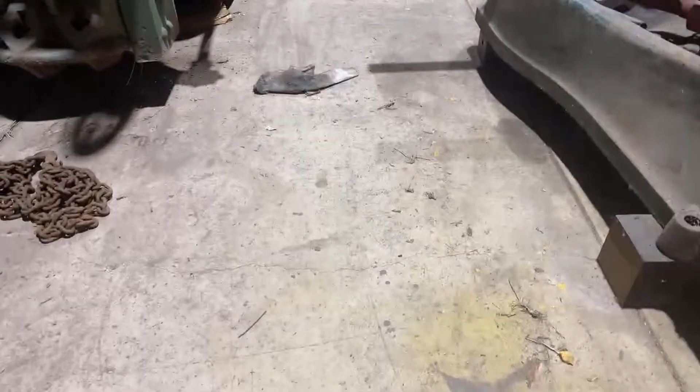Anyway, I was just sitting down for a minute because it's sort of fairly hot today, and I've been at work all day, I'll be honest. Couple of days, pretty big, couple of 3 days actually. Another one still to come. Anyway, we're getting there.

Hey, Bill. Broken glass or something on the ground here, I don't know what that is. Just looking at it now. No idea. Anyway, we should actually do something. Anyway, I'll get up.

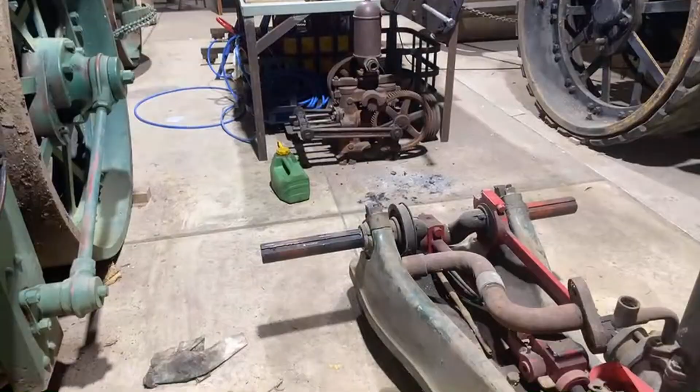Let's have a look. Here, my joints crack when I wait to get up. Oh. So,

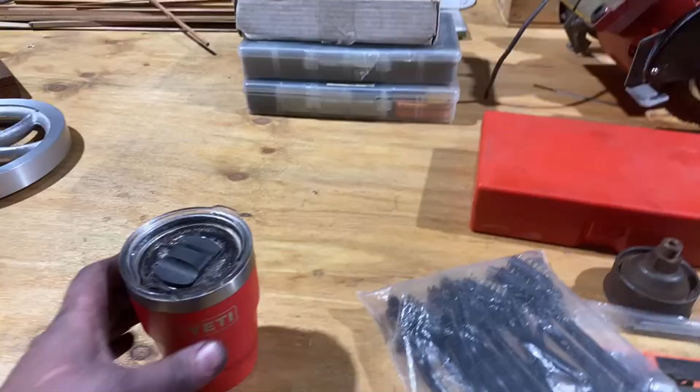Went away on the weekend. What did I do Thursday night? Probably not very much, to be honest. Probably had to sleep, did some groceries, did some laundry and stuff. Friday morning went out to Walker. Where's Walker? Walker's up on the tablelands, I guess, in the high country or south, that direction anyway, out west of here, and a bit south.

A club member had a steam engine and a sawmill set up there, so we had a bit of fun, a couple of nice meals, good friends. It was a really good weekend. I was out there, got there Friday night, did I? Friday morning, got there Friday lunchtime, couple of stops, Friday lunchtime.

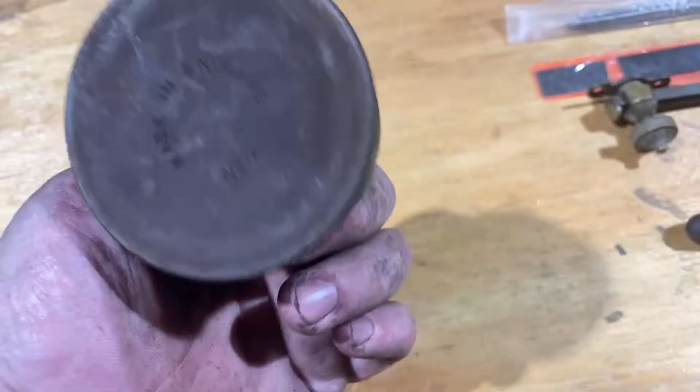What else? Found 2 new grease cups, like brand new, they got made in England written on them. They're not all that old, probably. Be useful for something, maybe. They were the right price, so 2 of them to match, a match pair.

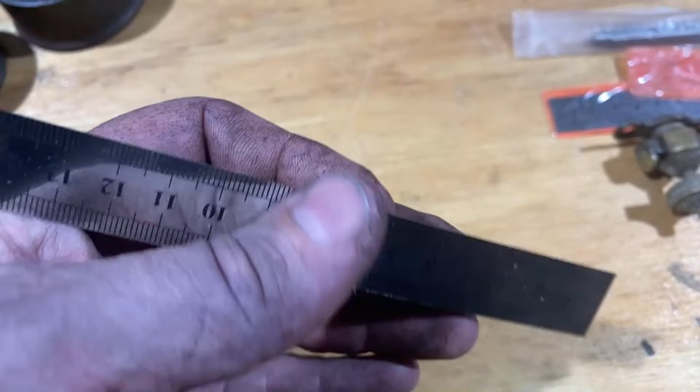Couple of these steel rules, gee, they're thin. Inch on one side, metric on the other side, hopefully. So they were worth having for $1 each.

Junk tool seller, always, never got enough of them. Inspection mirror, never got one of them, that's ever something you can find. So I've got another one of them, need one of them.

My watch just fell off.

They've got a fairly long flute, which is probably really good for drilling brass if they were sharp. This one looks all right.

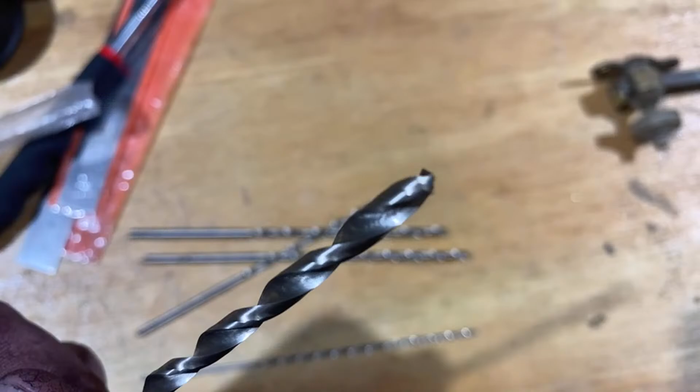I'll just zoom in here and look at some of these. This one's nowhere near on centre, right, no way that's going to cut. This one with a sharper might be all right. This one's sort of in the middle anyway, but yeah, not a lot of twist on that.

And this one's sort of in the middle too, but only just. So they're probably fairly average for the money I paid for them, but we'll see how they go. Might sharpen them up.

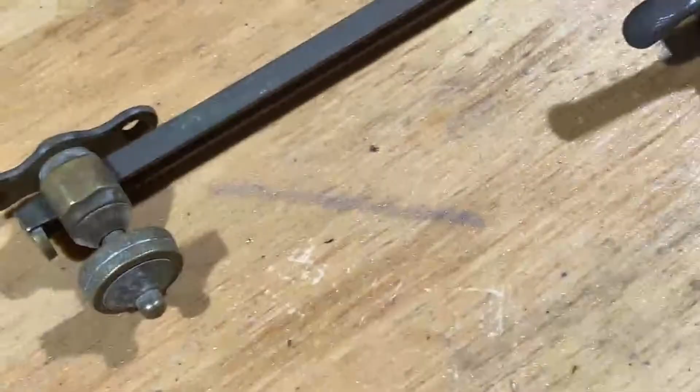Definitely Chinese. No idea what these are - they were in a plastic bag, so you couldn't really see them before you bought them. But I don't think they're much good.

They might sharpen up all right. Got a window support, which is probably for a hinged opening window. A knob to tighten it down, and a piece missing out of here - the slide's missing, but anyway, we've got one of them. Got a cupboard or a pantry lock or something, a window lock.

I don't know what that is - someone else might know, that might be useful for something. It all still works, lock works. It's got Lockwood written on it. It's probably been a half decent sort of a thing. Don't know, it's a cupboard lock or something. Got one of them. So that was sort of swap meet stuff. My watch fell off.

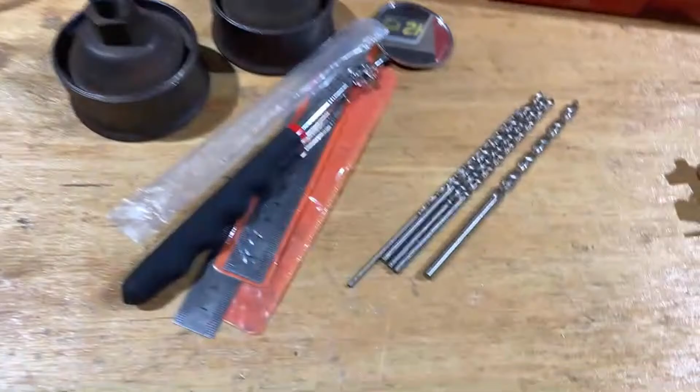Oh, mould. You'll hear that repeatedly, because it's true. It's how it is.

So I bought a couple of books, sort of the right price. $18 for this was a bargain, I thought. It's labelled Tool Steels, there's no author on it. It was sold by Angus and Robertson, probably quite some time ago. Tool Steels by J.P. Gill, who was the Vice President of the Vanadium Alloy Steel Company. G.A. Roberts is Chief Metallurgist of Vanadium Alloys. Anyway, it's put out by the Vanadium Alloy Steel Company, I would imagine.

Burns George, who is Vice President of Sales. H.G. Johnson is Metallurgical Engineer. G.A. Roberts is Chief Metallurgist. Anyway, published by the American Society for Metals in Cleveland in 1946. Dedicated to Roy Carnegie McKenna, Chairman of the Board. Copyright 1944. Third printing 1951.

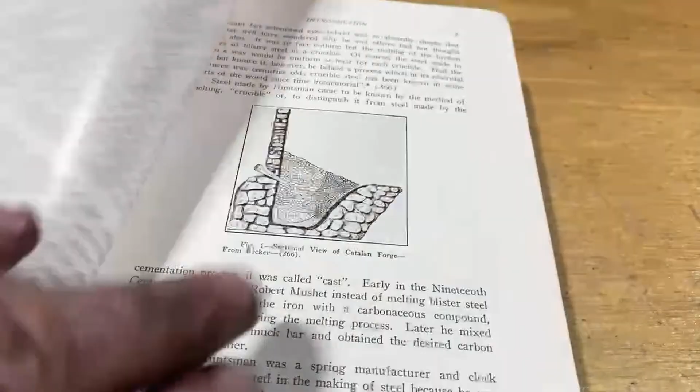Anyway, good book on tool steel, I think. Crucible steels and forged steels, manufacture and selection, cross sections, X-rays and microscope stuff - probably fairly interesting, and I probably will sit down and read it at some point. Die steels and things like that. Anyway, picked that up. Not Chinesium.

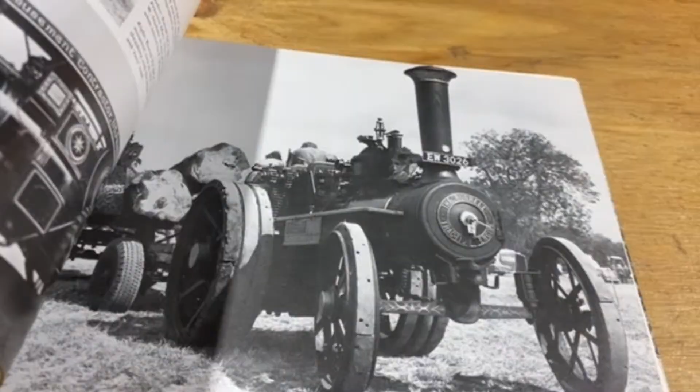This one I picked up too - Steam on the Road by Anthony Beaumont. It's an old book, wasn't expensive. No idea when it was published, probably it says in here 1979. Anyway, lots of black and white pictures. I haven't really even looked at it. It's an Aveling roller, big one - I think a 10-tonner.

Lots of rollers and engine things in here. Nice grain engine and Burrell, double crank compound. Crane engine. Anyway, another cool book.

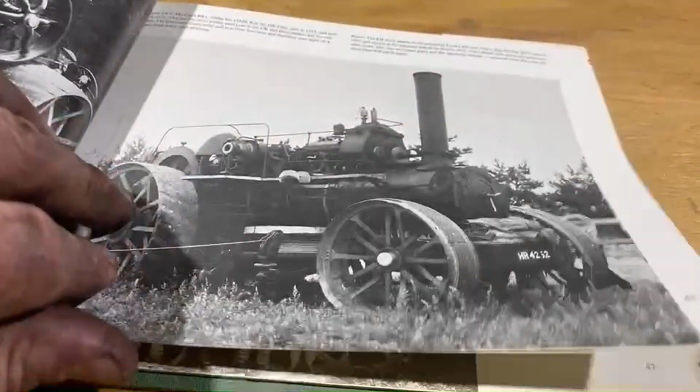Clayton and Shuttleworth roller. Lots of pictures. It's a motor wreck - a bit sad, that's an early engine. Fowler traction engine, a single cylinder traction engine, 3184, in 1870. An accident caused by a carelessly inserted wheel pin coming out when descending White Hill, Chesham, Buckinghamshire on the 1st of January 1900.

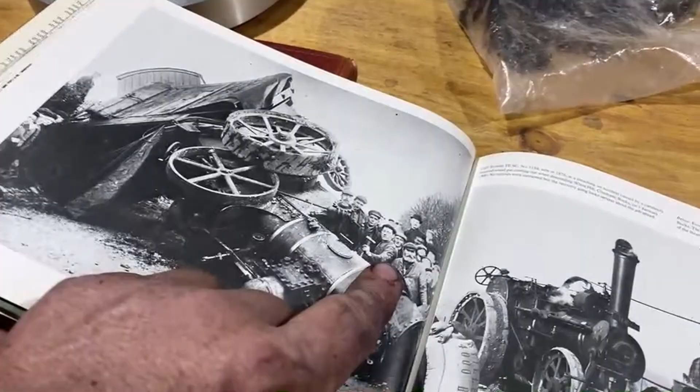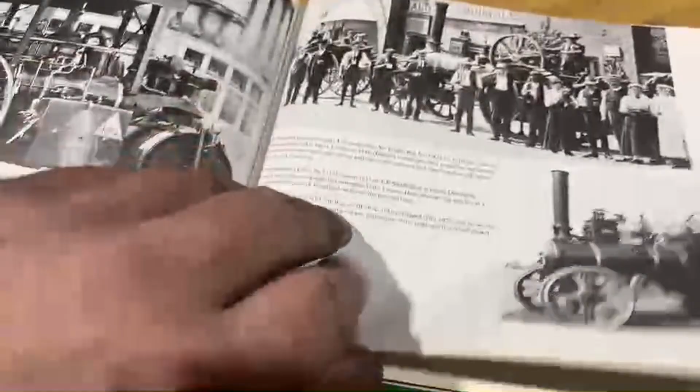The Super Sentinel tipper, and then an S4, yep, another S4, an S8 there - big truck. Early Tasker there - lots of rare stuff, very cool. Anyway, so I picked up that book, those couple of books. Figured they were worth taking home.

What's happening? New video from Bill last night. It's good as always.

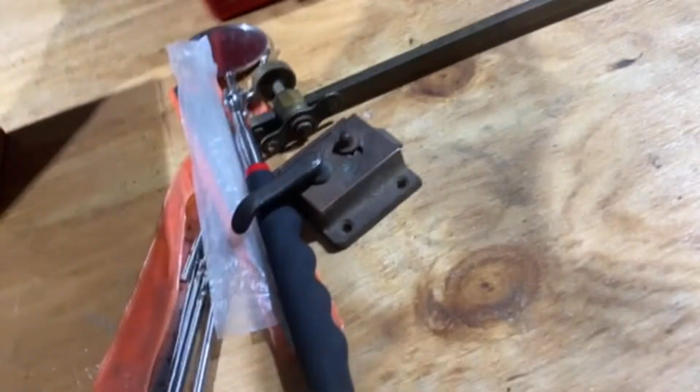Let's shift some stuff - I'm doing so well with anything here. And it's open upside down - look at that, look at us go. Probably not open upside down, but we're going to open it this way up. Right, so what we have is a vellum duplicator, screen print duplicator, or whatever you want to call it. Needs a clean up.

This is spring loaded. It's got the remains of a notice or minutes of a meeting or something still stuck to it. It's got a pretty reasonable screen in it, I think.

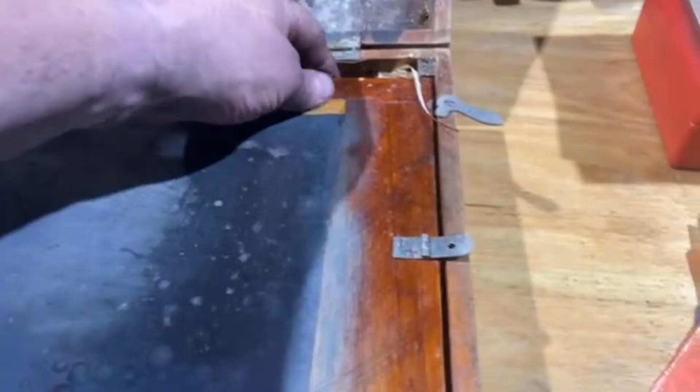It's got a bent little lever there. It's going to need straightening out to hold the paper in place. Basically you put this down and you run the roller with some ink through it, and it prints through the thin portion of the paper onto whatever you're printing. So basically it's an early form of photocopier.

This special vellum paper was either done by writing on it with a pencil, or you run it through a typewriter. Not ideal. But what I had in mind was to retrofit it a bit more and maybe make some stencils, print or somehow cut some stencils.

So it's a thought process. It's about all it is at the moment, but that locks down, then I think the roller does come out if you're really careful. There we go. All needs a good clean up.

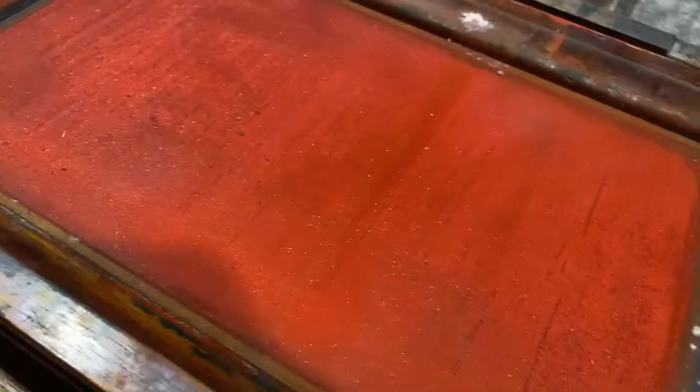If anyone has any experience or knows where there's a stack of... put this back in place here and lock it in place. If anyone knows where there's a stack of either vellum paper foam or some way of making a decent little stencil that we could put down in between and print through, I'd be keen to hear. So there we go.

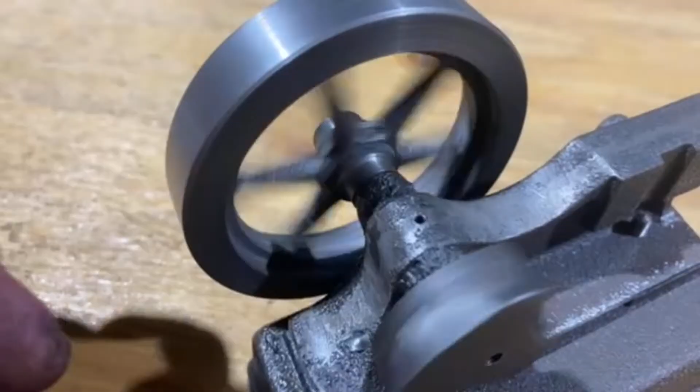This is the Stuart Turner Progress. We got the crankshaft in pretty nice and the flywheel spinning nice. He has an eyes being bigger than his belly problem, I think.

I think the truck he's bought is probably more pickle. I'm not sure it's any better mechanically, but anyway, I think it's been registered recently and it's probably in reasonable condition.

Anyway, why has this zoomed out? Has it zoomed out? No, it hasn't zoomed out. It's zoomed in. Try that.

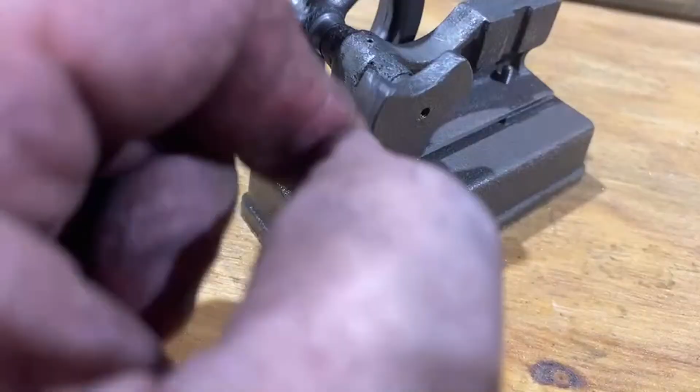So, got the crankshaft in. I've just Loctited that on there. I haven't actually peened it over or anything, it's just screwed on. We'll see how that works.

Hopefully I can face this off and machine the edge of this round, and put a pin in it.

This still needs... this face here is still rough, I haven't actually machined that. I've machined this one here, but this one's just been chopped off. So I need to set that up, that way up, I guess, somehow. Machine that off, machine those ports.

I've fixed the studs that were the wrong way around in there.

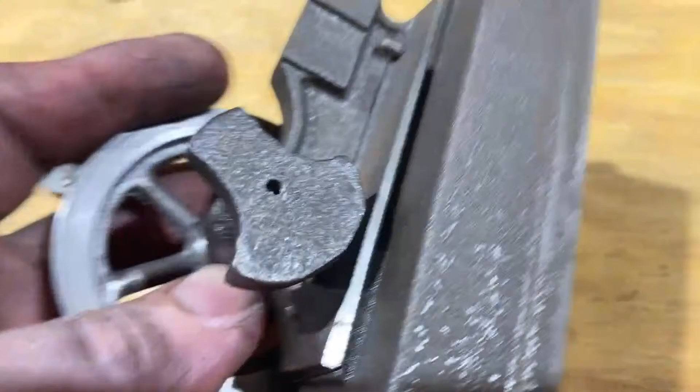So I'm probably just going to set it up in the mill, either that way and machine it, or that way and run the end mill past it, something like that, and make it parallel with the other end.

This needs a pivot screw and a spring, and it needs quite a lot off it in places. It doesn't need very much off this port at all. I'm not going to take much off here. There's some holes and things to go in there that are a bit tricky, but this needs quite a bit off it still, probably...

1.6, probably nearly 2 mil off here, and it needs cleaning up around here. And this needs a couple of mil off it too, to drop it back so that just clears there.

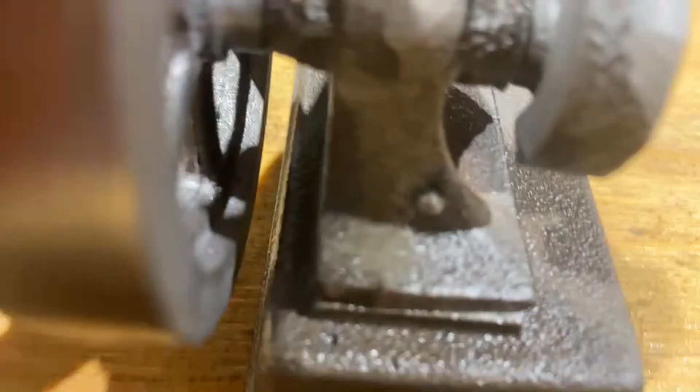And then that's starting to look all right. I'm pretty happy with that. I think it's probably a fraction tight, if anything, but I think it'll free up pretty quick. That's how it wants to be.

Need to make a piston rod for this. Need to make a pivot bush for this and the big end. Need to machine this and put a crank pin in it.

And then we need to drill a centre hole in here for the pivot to go through. We need to face these, and we need to put 4 ports in here, and drill this through and put 2 ports through right through from the end.

Probably block one off and run the exhaust out the back, and then tap this one, the top one, for the steam inlet.

Or the other way around, something like that. Anyway, it's coming up all right, pretty happy with that. At this point, very happy with that.

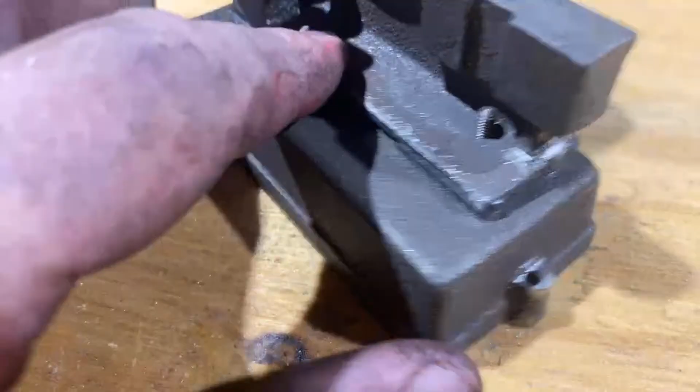This week I've sorted out this crankshaft, and last week I've machined this base, put this on here. These little bosses on the side here are not anywhere near in the middle, unfortunately.

So we're going to file them up to match the holes. This one's a little bit closer, so that's a bit of a job.

It's got 2 screws in from underneath, holds that in place. Flywheel position and everything looks really good. I think it'll be all right. We'll get that going, it's another job. I don't think the flywheel will wobble.

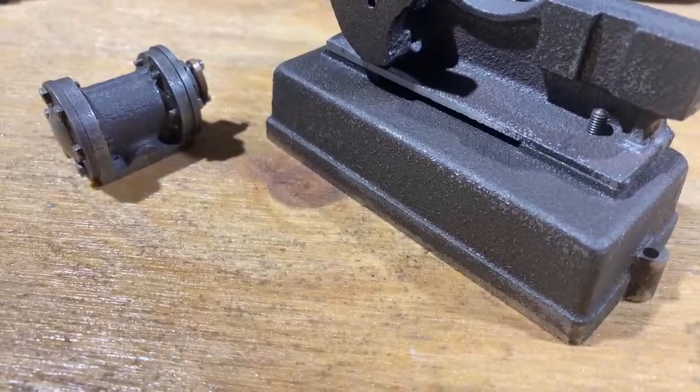So that's one thing. It's coming together pretty nice, actually.

I think it's going to be a nice little engine. There's a bit of work in it.

Needs some tiny pinstriping, that's very true. We can sort that. We need some nice paint to put it on, is the problem.

But we'll see what happens. It's going to be a nice little engine. Get this one finished.

That's the book, if anyone's interested.

Henry designed a lot of, or helped with the design of a lot of Stuart engines. I don't know if anyone knows that. Henry Greenley.

I guess these two were mates, but I think the number 10 and probably the S50 and the number 7, the number 1, I know for sure that it was a Henry Greenley design.

So this little Progress range of engines was part of that. Stuart only make the oscillating engine now. They don't do any of the more fancy ones in the Progress range.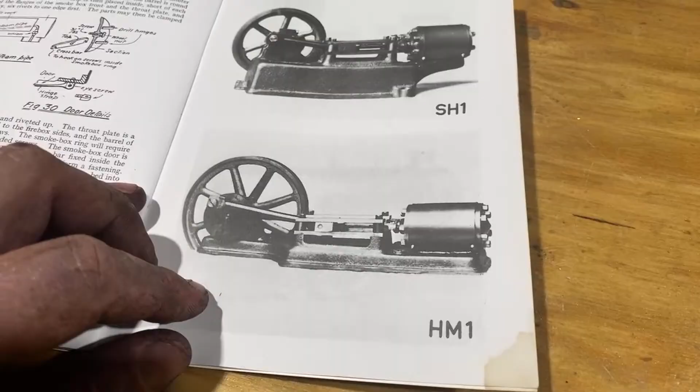These are no longer available. I guess they'd be buildable, but it has the same cylinder on it and very similar parts. I think this one probably has the same flywheel.

There's an under type too. I did see someone had a set of castings they were building for one of them on Facebook the other week. Very cool. Anyway,

That's basically the instructions. There's no drawings for it, that's the instructions. And the instructions are pretty...

That's the drawing basically. It's the port drawing, cylinder ports. It's a diagram on how to make the big end, which we may or may not follow.

There's the crank. Sort of. It looks completely different on the other engine. There's how to make the piston.

How to machine flywheels. Covers. How to make glands.

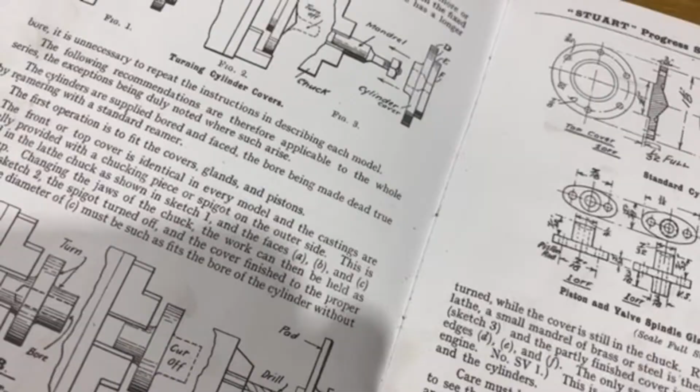And it's not a bad little double action oscillating engine. Anyway, that's one thing we've done. Spent a bit of time on that, a couple of nights this week, a couple of nights last week.

Didn't do very much actually. It's a new video from TMB. How cool is that? Didn't do very much tonight, but I did mess around with it. I put that crank here, machined the back of that, and drilled it and tapped it and put it together.

The fourth Wiseman, that's a very good question. Probably is, it's called dynamic balancing, I think, isn't it? There's probably all sorts of formulas, but we're going to put up with what we've got here. It's probably more decorative than useful, to be honest.

Anyway, so that was one of the things. Some of you have already seen this. Did this. It's not terrible. It's not particularly as nice as I would like, but it's not a bad casting.

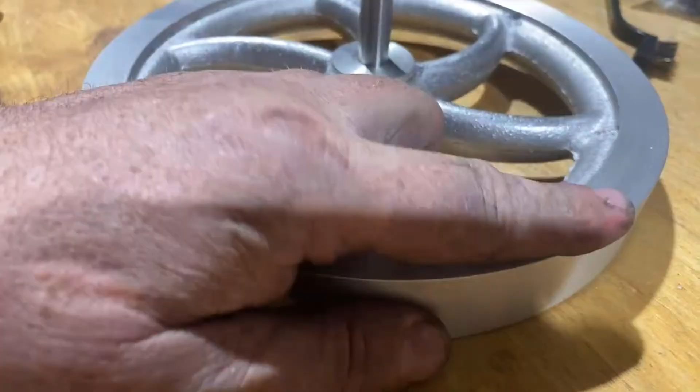We did these up at Petrie at the Trades Guild. It's a set of castings, I think you've all seen them. There's some, have a look. There's some funny bits of metal in them. Look, there's all different colours in them around the rim there, so there's different alloys.

Yeah, it's to counter the piston rod, that's right, but I don't know, if it vibrates we could probably take a bit off it. So we do have noisy crickets. Now you point that out, Bill.

Based on piston weight, yes, it's probably not going to get that well balanced.

Excuse me. Anyway, this flywheel - last night I stayed back at work instead of doing constructive stuff and got to machine this up because I had a suitable lathe for the night.

Now, it's got a sort of a difficult thing to machine. All flywheels are - everyone knows that who's ever machined one. It's not bad.

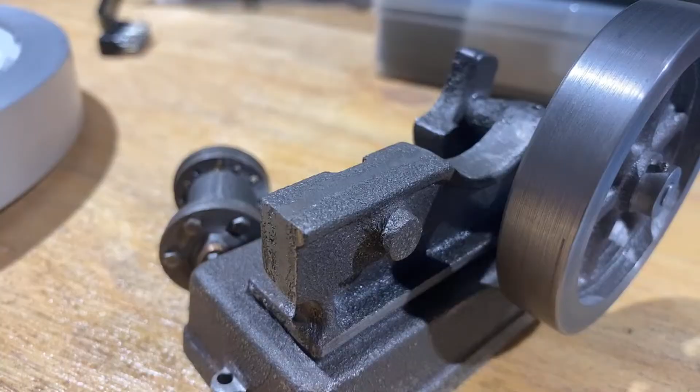Some more progress next week, right? If we could get it running fairly quickly, it'd be nice. If nothing stupid happens, we'll have a bit more progress next week.

So I've actually Loctited that in because it was a fraction loose today when I came out after work, like because this had warmed up, I think, and I actually ran it under the cold tap and cooled it off, and then it was sort of a push fit again. Anyway, I put some 680 Loctite on it with some primer and everything, proper system. I don't think that's ever coming out. It's in the right spot.

It's got to have 1.84 inches.

Sticking out, which is correct. This is a hardened gauge pin, and it's got 2 needle rollers running on it. It doesn't stick out all the way here because there's a dummy shaft that goes in there with a key in it, epoxied or cemented or Loctited in there, making it look like it's got a crankshaft with a key in it, which is very clever. It's a smart way to do it because it means you've got a really nice, very simple crankshaft, and the crank web's a tight fit on it, and it's got a set screw in it to stop it turning.

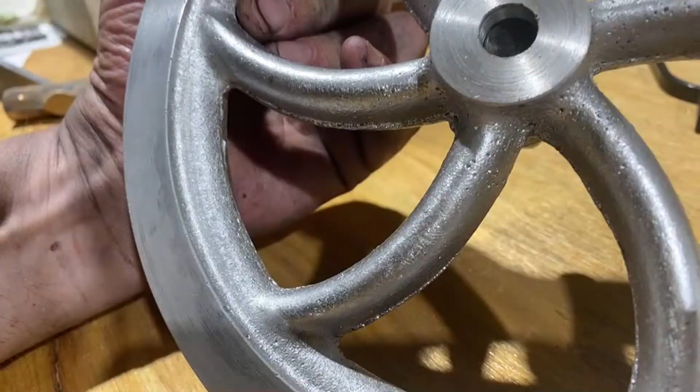Anyway, so it's not a bad job. There's a couple of holes in the casting when you start looking. There's one there. There's one there. There's one there. I know that feeling, Bill, and I thought there was one on this side too. No, can't see any. There is a couple of spots there in the rim.

Now, 2 ways to deal with that. Probably I've got some aluminium powder and we're going to mix up some epoxy and fill that up. It's just a porous casting, and we could put some JB Weld in it or something. It'll be a different colour, but maybe we're going to paint this whole thing anyway.

And I'll give all this a file up and get rid of the flash marks at some point when I've got some time. Anyway, this was 3 hours last night, and we've got a pretty decent flywheel. It's not a project really, it's just one of those things. We needed to machine a flywheel, so we have. End of story, no more information.

Super glue and aluminium powder probably works too. We've got some really nice marine grade 2-pack epoxy at work. I think I'll mix some of that up and put it in with some aluminium powder. I've got a tin of aluminium powder, I've got no idea where it is. If I find it by Friday, I might do that.

Absolutely no idea where. But it's probably going to get paint all over it anyway. At this point, I don't know, maybe just the outside rim polished. We'll see.

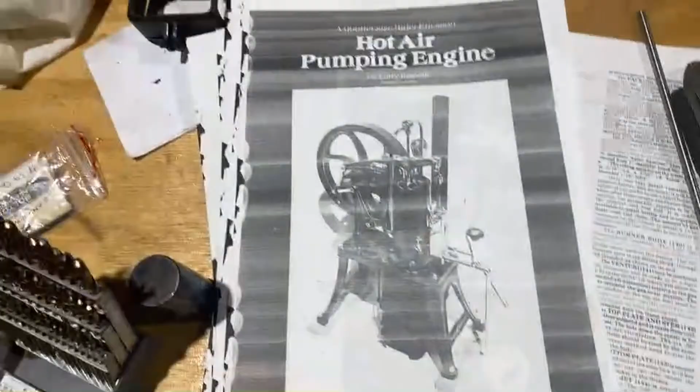There we go. Quarter-size Rider Ericsson hot air pumping engine. There's the instructions for it. And that's not really the first part to tackle, but while we had the lathe opportunity, we did it.

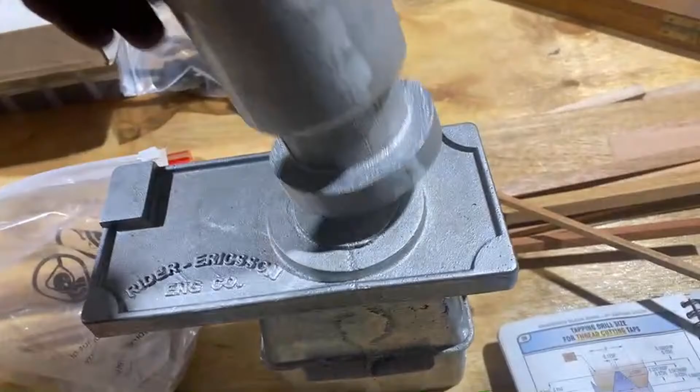These are the castings. So this base is probably the first bit we're going to tackle at some point. Needs a hole in here and row holes on a PCD there, and this is machined to fit over there or fit inside there. Machine flat on here and flat on each side here.

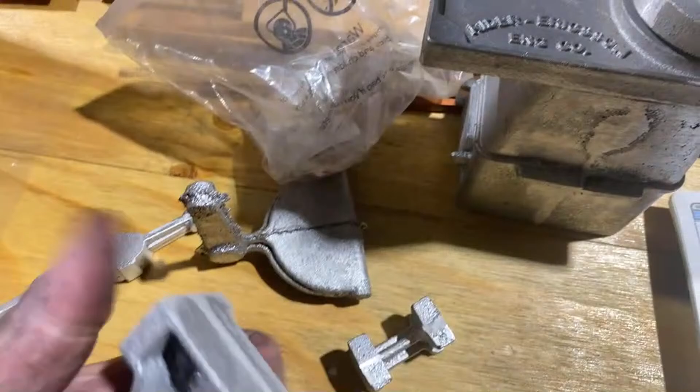This one on this side here is for the bearing support. Goes there, something like that. And that's machined there, and it's got bolts in it.

There's a pivot pin in here for this lever, which is a bit ugly, and I'm going to melt it down and start again compared to the other castings.

This board here is for the rocker arm bearings, goes like that, something like that. There's a slot in here for the displacer rod to come through. So the water pump goes on this face. And this is machined down, and there's 6 bolts or something around here to bolt it onto here.

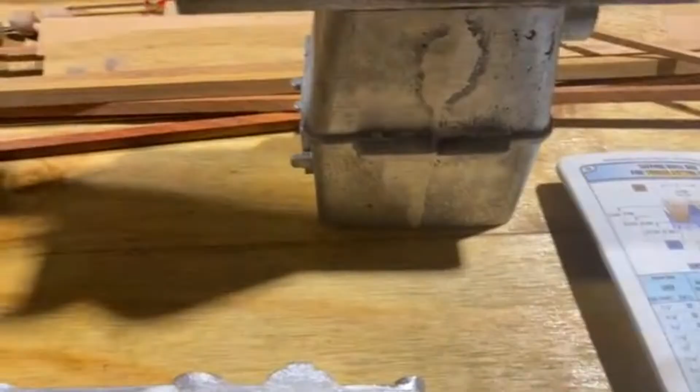There's supposed to be 2 legs for it too, they haven't arrived as yet. We're getting there. So there's an assortment of castings, if anyone's interested. That's pretty nice. Most of these are fairly straightforward little jobs.

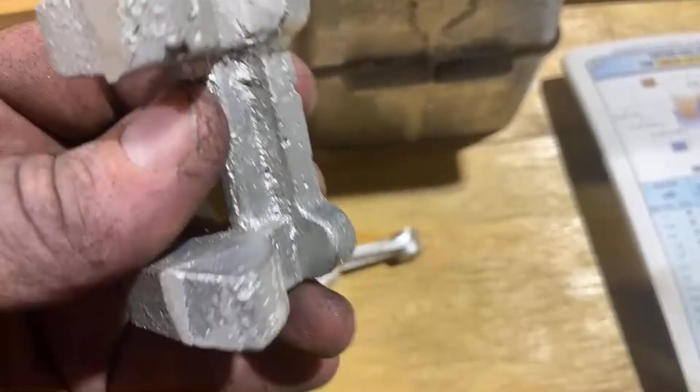This bearing support, not much to it, to be honest. Face off and put 4 holes in it, and put a square cutout in here for the bearings. And it's got 2 holes to hold them in.

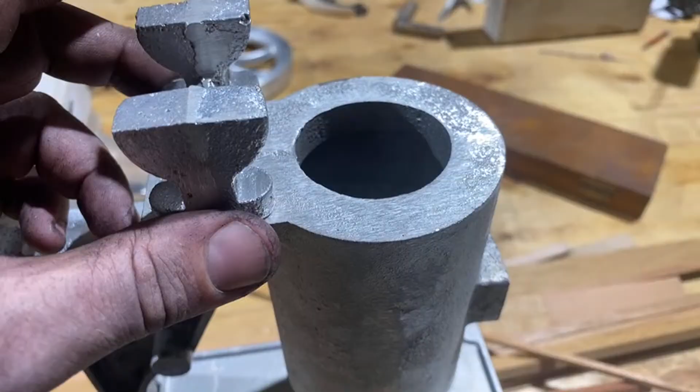So this is machined down here to bolt that on there, like so. And this is bored, and there's a steel cylinder that goes in there. It's just in place.

It doesn't get hot up there. In fact, it doesn't run if it gets hot up there, it's got to be cold up here, and a little water pump to circulate water to give you a longer run.

The measurements were exact, so I don't know. I really don't know, I think it's very close. I've done a bit of a Google search, and no one who's built the engine in real life has actually had problems with it, so apparently it works.

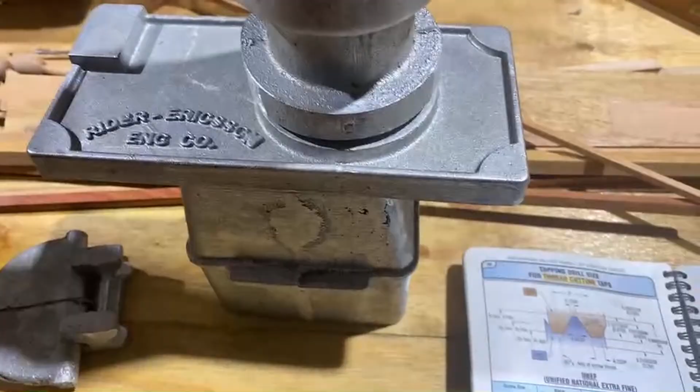So this has just got a step on here that goes down that hole in here, and bolts in place. Sort of a liner or cylinder liner goes in here in steel. Had trouble getting a piece of mechanical tubing with a precision bore in the right size. I've got a bit coming from China, but probably not till after Chinese New Year's finished and they get back to work to cut a piece off.

So that's doable. The legs are still in Queensland. It's got two nice ornamental legs, go one each end to hold this in place.

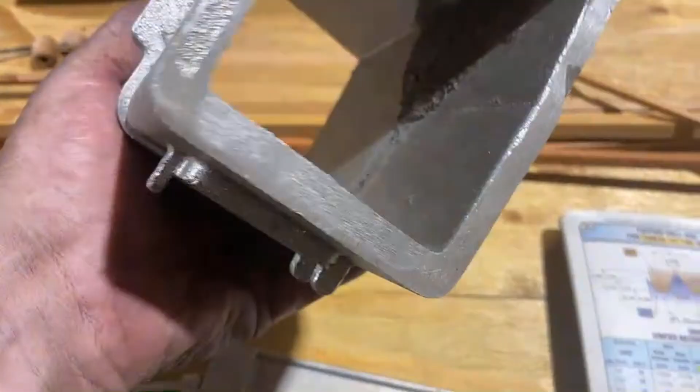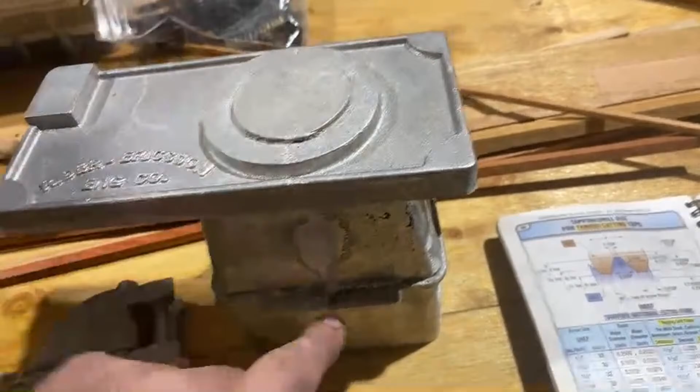This is basically the heat exchanger of the firebox. There's still a fair bit of sand in that, but it's got a burner in it and a sort of pseudo door, and then it's got bolts that tap into here to hold that in place up against it, I think. Maybe they hook over here, I don't know how that works, but that actually has a clearance to get the air in underneath it, and there's a burner.

This casting I'm not happy with. I did this one myself in a hurry because it was one missing out of the set. I'm going to get Charlie to do it again because I'm not real happy with that.

These are pretty sweet, really. They need a bit of a clean up, but they're not terrible. There's not much wrong with that. A bit of sand wash out there, but that'll clean up with the Dremel. And that'll machine very nicely.

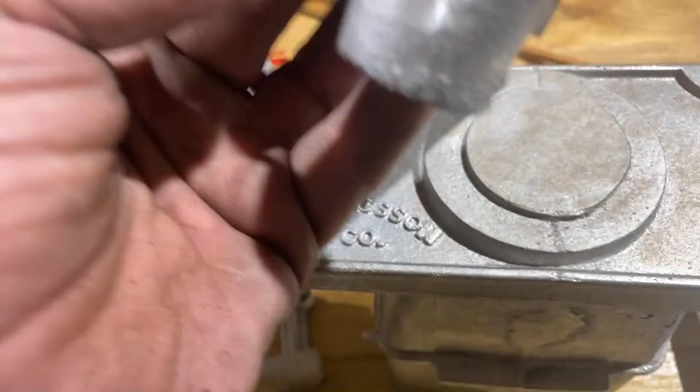This one needs to be bored for 2 needle rollers. These are machined and bolted, one here and one on the cylinder. And this has got a pivot pin.

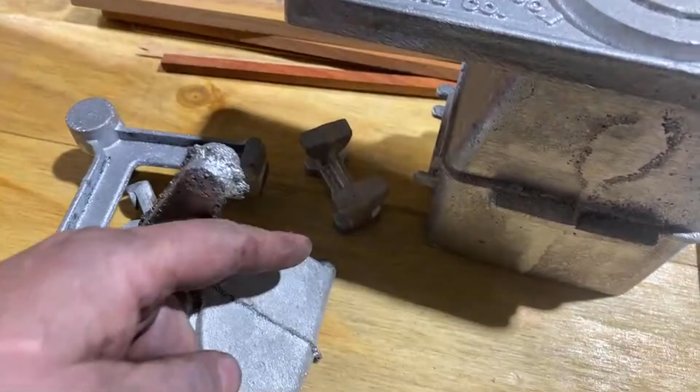Which this piece pivots off there like so. And there's a lever off the crank which moves that up and down. And the yoke over the top here, it's got to be machined out to go around the cylinder there. So basically it fits around there.

And then there's a rod over the top, and that moves the displacer up and down. And the piston works on the rocking arm.

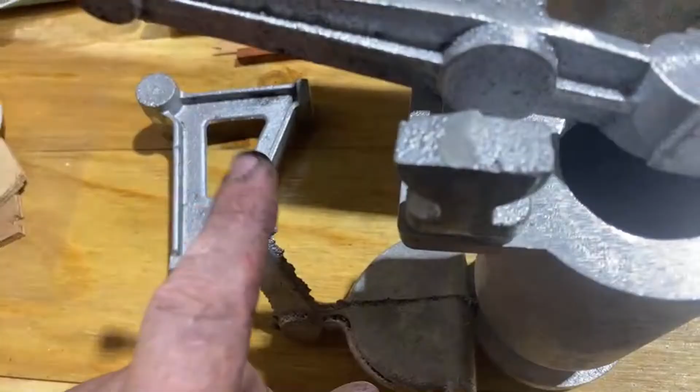Put this on here like so. The rocking arm goes here. I believe the piston works off here somewhere with 2 rods. And there's a crank arm on here which comes down to—this is clear as mud—and comes down to the crank, which moves this up and down. And it's got a slot to clear the displacer, and there's a pump works on this one.

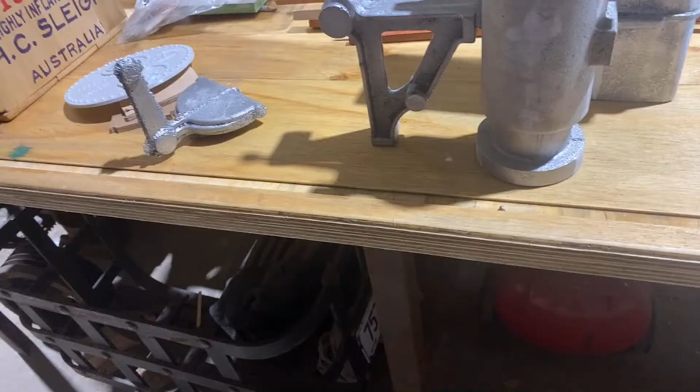I'm not sure the CNC mill is going to get me any faster or more accurate. I think this will go together very nicely. CNC mill's all right if you've got one to throw out while you're getting it set up, and you don't mind spending all your time programming. But at this point, this won't take a lot of machining, and there's not much to it.

I've said that before, famous last words. I'll set this up, machine that edge, turn it round, machine this end, bore it, and set it up and machine that one, put some holes in it.

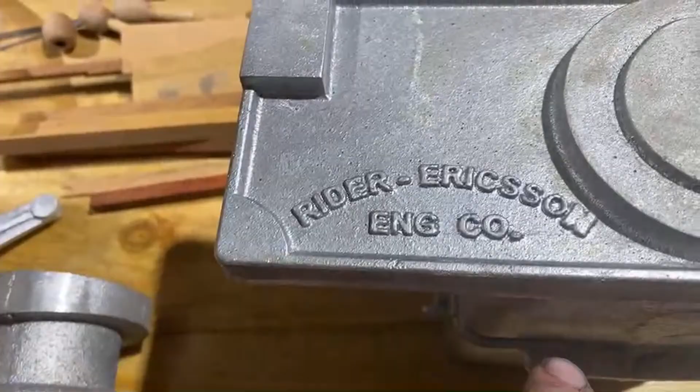Probably start with this piece at some point. I'll machine this, get some legs on it. The legs look like—because we haven't seen those, sighted those bits yet—but they do look like this sort of. Yeah, there they are.

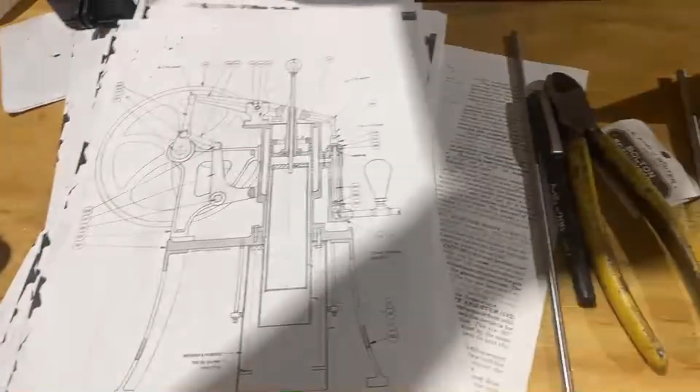They are easy, but there's a lot of jigs and things to be made to set everything up and get everything right. And honestly, a lot of bits on this are just going to be filed up. They're not going to get much more complicated than that. So looking at the...

Basically, this has got a step on here, I don't know if you see that. There's a step on this cylinder, which goes into this hole on this plate. The legs just bolt underneath here. And there's a displacer cylinder bolts underneath all that with a gasket, which is...

This displacer cylinder works inside here, which has got to be airtight. This has got a line that comes down here.

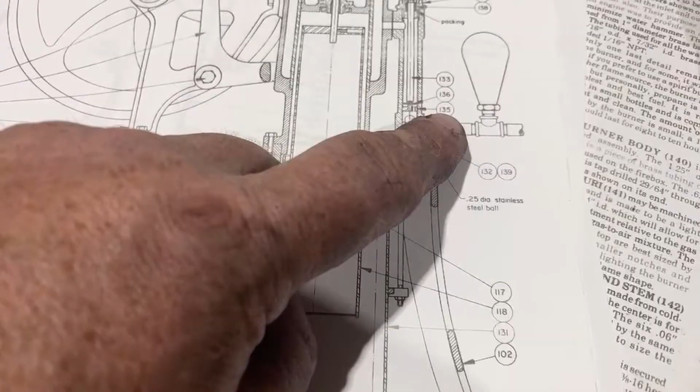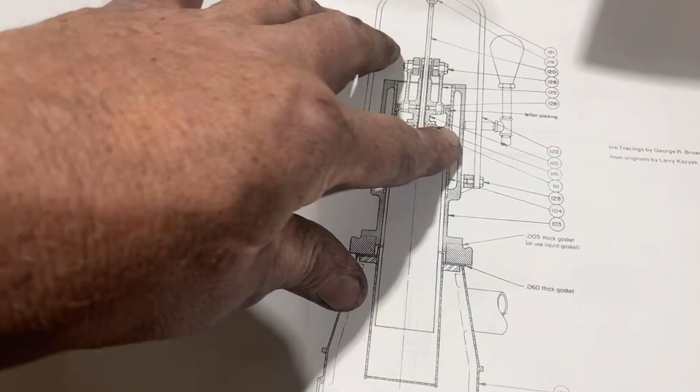There's a pump here. I don't know what this pump ball is for. It says it's got one, don't know what that's for. Seems to be, here in the side of it, a T-piece and a pressure pump sort of chamber. It must stop. Don't know, but the water pump works through the cylinder to keep it cool. It's got two rods here on this fairly complicated little piston. That's probably the difficult bit.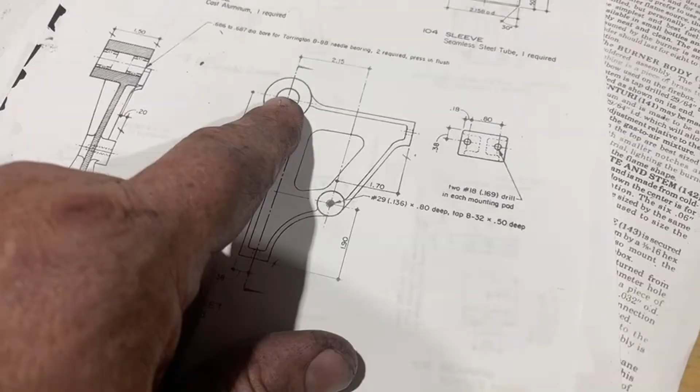So it's got 8 bolts around there, 2 bolts for the legs, or 1 bolt for the leg, and no worries, then 2 bolts there. The sleeve looks something like this. It's 2.156 outside diameter, 2 inches inside. Basically it's just a matter of setting it up between centres and machining the outside diameter, not really messing around with the inside too much. This has got a 832 hole, which will convert to BA or ES probably. These here are bored to fit the bearings like that. Not much to that. The legs are basically like this.

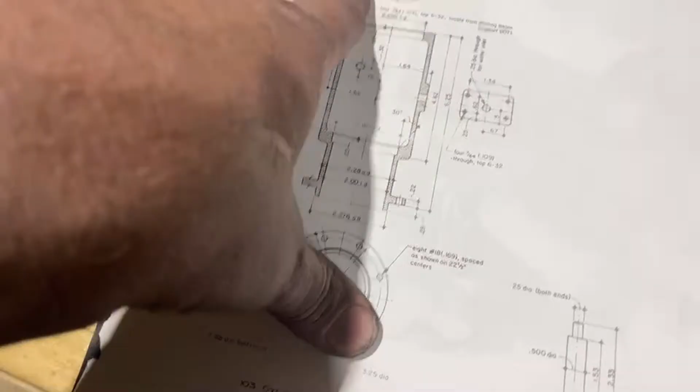This shows the rocker with the slot in it, the 2 holes on the outside to pick up the piston, and 2 little bearings in bronze. I've got quite a bit of bronze for them. The cylinder, how it all fits together and how it all works, where all the holes go, and lots of machining directions, really. It's got quite a lot of information about that. It's a very bad photocopy. I don't think anything's really insurmountable.

There's the flywheel drawing, and the crank, power piston, displacer piston, which I'm not sure I'm going to go ahead with like that. I think there's probably a better system now someone's found. Piston rods and things, power piston, displacer cylinder. Anyway, it's not a project yet.

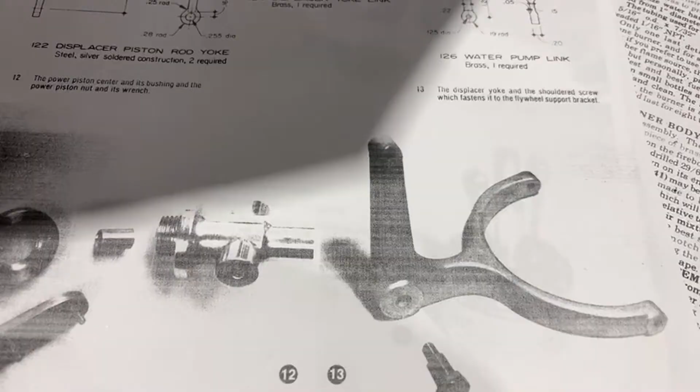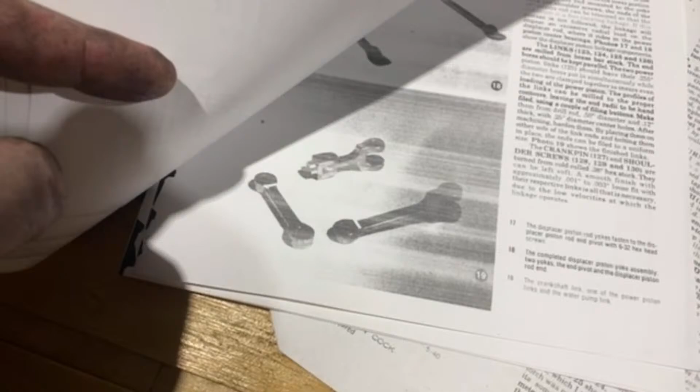All the other bits. There's that, basically that spot that crank arm looks like, and power piston bushing. A couple of levers there, and various different systems for setting up the firebox. We've got a cast one. Whether I'm going to continue on with that, I don't know. Pump - all the pump bits, priming cups and things, and the burner.

So it's all there. Don't know, not going to promise anything. But we've made a start on the flywheel. I'm not sure there's going to be much else happen. I really want to get that little Stuart done before I even look at this anymore. So don't expect too many miracles.

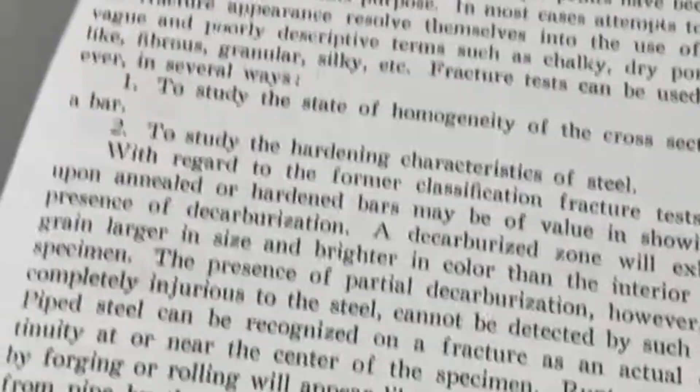John, we'll just go over this again because I was wondering if you were going to come in, as this is something that might interest you. I don't know if you've got a copy of this - tool steels. Picked this up on the weekend. Alloying and chrome vanadium, die steels, all that stuff. I'm going to sit down and read this, might learn something. Also a good book - don't have this one. There you go, I figured you probably would have. But no. So that's where we're at, that's what's happened really this weekend.

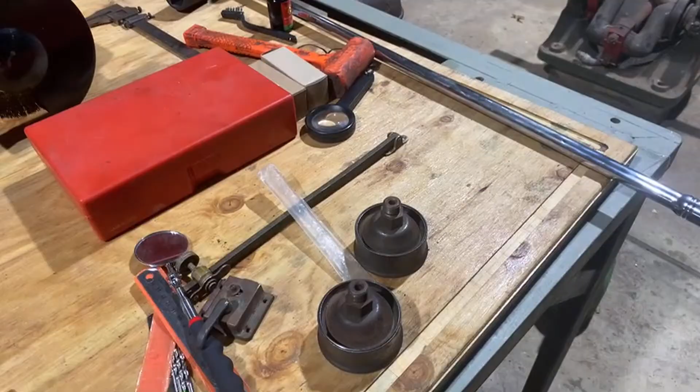Someone's going to ask me, so we'll have a look at this too while we're standing here. Now, I have 12% of my battery left, so if it goes flat, I'm not coming back, right guys? I'll say goodbye now, but we'll carry on for a bit. Been messing with this, right?

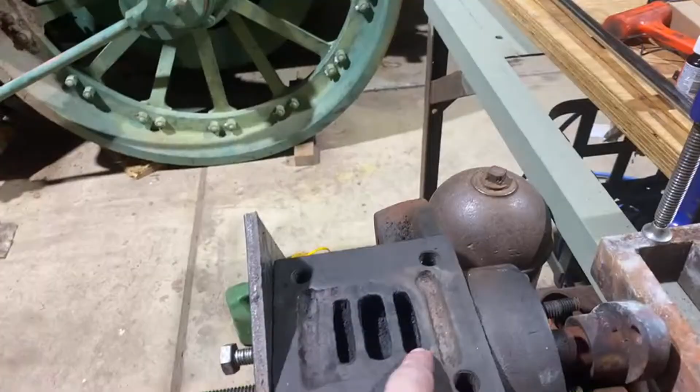Went in a bonfire the other night for about 12 hours, too hot to touch, a bit hotter than that. Since then I've given it a good scrub out with a wire brush, and a good dose of tea tree oil, a good dose of eucalyptus oil down here, which seems to be going somewhere because that was full an hour ago, and you can't see any in there at the moment. I can't see where it's moving. I don't think it's evaporating at that rate of knots - it could be, but I think it's going somewhere, soaking in, going back past the rings. With this plate off, it sort of looks fairly damp on the outside there, so I don't know. I feel like probably it's coming back past the piston.

It might be coming out here a bit too, but I can't see any damp on here really, on the rod or anything. It wasn't glowing, it wasn't that hot. It's got brass on it, this is brass, so I didn't want to stuff that up. But it's been fairly warm.

Now I put this plate back on last night and clamped it up here on the bench, and got into it with a 3/4 breaker bar and a big socket on the end here. And something moved about 1/8 of a turn, 1/4 of a turn, something like that. Like it groaned, but once it buttoned down, it went probably 1/4 of a turn before it moved, before it locked up again.

So something's moved. Now I will put a Sharpie mark out here on this rod and see if that's what's moving, see if the piston's moving down. I can't see a crack here, so I don't think it's the cylinder head coming off.

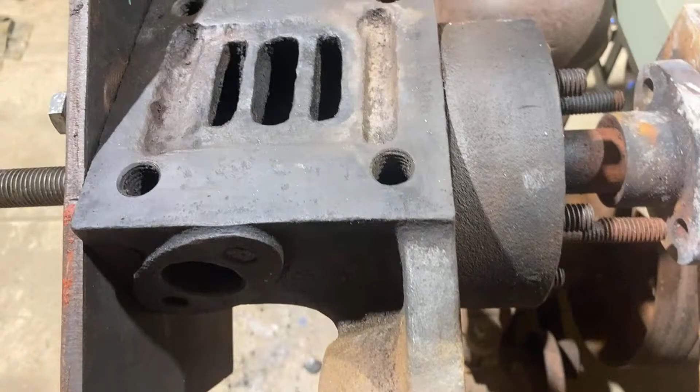Once we've got the rod out, we're going to have to put something in here and push the piston and push this off. This cover's in here about 1/2 inch, and it's locked in pretty solid. So hopefully soaking it in eucalyptus oil will break that seal there in between there and there.

PB Blaster, I'm not sure what that is, TMB. Have used like a rust spray or a CRC spray, I can't remember what it's called, with not a lot of success, to be honest.

Anyway, we're going to leave it a week. It's been 100 years or more so far, another couple of weeks won't hurt, I guess. But it'd be nice to get it all apart. Then we can start thinking about putting it back together.

Anyway, that's a bit of a project. And it's stuck pretty well, but I think it's weeping past the piston is what I think's happening. So hopefully it frees up. Be nice to move it.

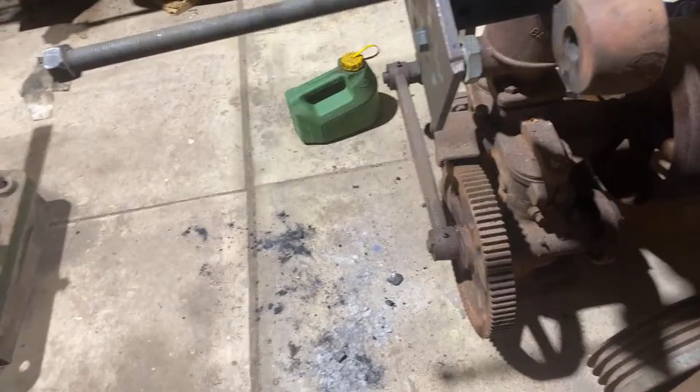I haven't put these bolts back in. I thought tonight maybe I might give it a reef on there and see if it moves again, but I think it's too soon. We'll give it a few days so I can see what happens. Probably tomorrow night I'll go and get a big bottle of eucalyptus oil and see if I can get it full and see what happens, because it doesn't evaporate real quick. Don't know. Anyway, that's that.

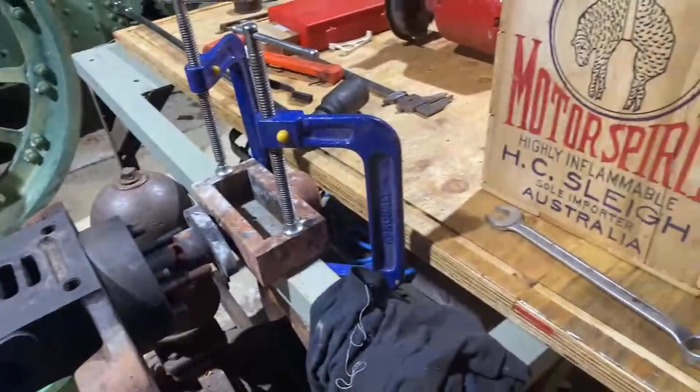Saturday, I believe we're rebuilding the carburettor on the Howard. It's got a dirty bowl needle or something. I think the filler needle on the float is probably stuck or dirty or damaged or bent or something, and it's not releasing as well as it could, so it gets a fuel bowl full of fuel and runs and starts, and by the time you get on it and change gears, it stops. So I don't think there's much wrong with it, but we'll have a look at that.

Saturday too, we're going to pull the injector off this engine down there, which will be a fun job, but we're going to do that as well.

Molasses is probably the answer. I think eucalyptus oil is as good, probably got a bit more bite in it. We'll try eucalyptus oil, I've heard good things about it. We'll see what happens, it works similar to molasses.

I don't happen to have any molasses, and eucalyptus oil is fairly easy to get. It's a little bit runnier too, so it goes down all the cracks. Anyway, the theory's sound, we'll see what happens.

Red lead paint sticks pretty well, yeah. I think we've burnt most of it off, but if we could get that cylinder cover off, I'd be stoked. And probably the rod out of the piston, and start looking at getting it apart then.

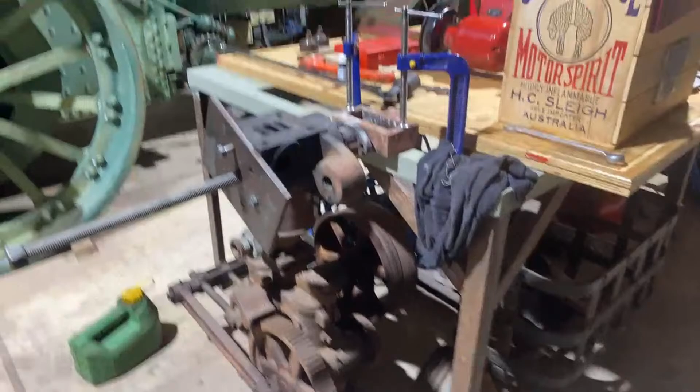Anyway, it's a fairly major rebuild job, and it won't happen overnight, but it'd be nice to have it in bits.

I don't think there's anything else to cover. We've sort of gone way over time.

Dinner's calling my name, I've got lasagna in the fridge I'm going to heat up, and have a cup of tea, because that's really probably more important than anything. I'll be in Discord for a little while, I'll take the computer across to the other shed and sit in the kitchen.

Have you tried to unscrew the rod? I don't think it unscrews, to be honest. I have tried rocking it backwards and forwards to try and move it sideways. It's pretty well secure.

I believe the drawing from Beyer Peacock that I have says the piston's just on the rod with a nut on top. It doesn't actually have any keys or thread or anything, it's just got piston through it. A piston rod just goes through the piston, the nut goes down on top, so once the nut's unscrewed, that thread is working directly on top of the piston rod.

Progress on this will probably happen, I've got plans going forward that might happen. Progress on this probably won't happen, don't expect miracles on that. Progress on this will certainly happen, we'll get some jobs done there. And progress on that steamroller, nothing's going to happen. There will be some bits fixed on this, I hope. Anyway, there's a steamroller here, and a steamroller, another steamroller here.